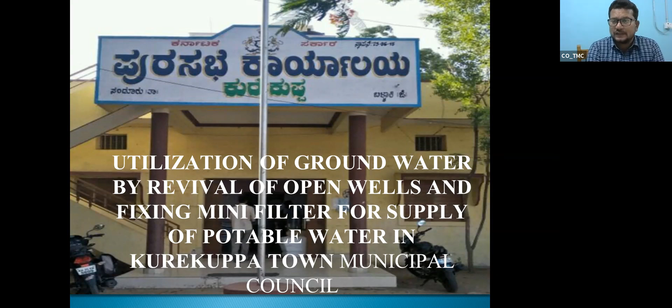I am presenting about utilization of groundwater from open wells. I am the chief officer of the town municipal council, Kurekuppa. Myself, B. Abdul Rahman. Kurekuppa town comes in the taluk of Sandur, in the district of Bellary in Karnataka state, where there is Asia's largest steel plant in our jurisdiction, which is called JSW, and it's a mining area. You all might know that.

In the year 2015, in the month of June, our urban local body was constituted as a town municipal council. Earlier, it used to be a gram panchayat. In every smaller urban local body or gram panchayat, there used to be a water supply scheme, which I'm going to show in a slide.

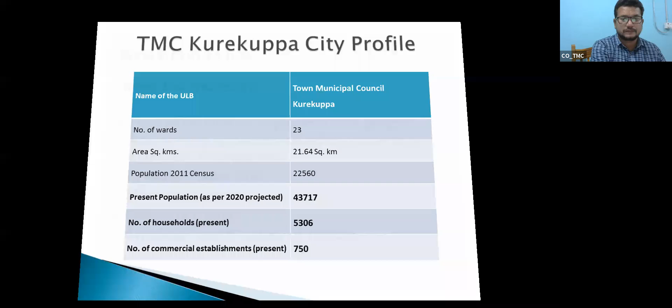This is the water supply scheme any town or gram panchayat is supposed to have, where there will be a source like a high level canal or a river, and we have to store our raw water in an impounding reservoir to supply the public for 365 days. It's an obligatory duty of the urban local body, per capita 135 liters per day. In such a situation, we were not having a 100% water supply scheme in our urban local body.

Once again I want to repeat the necessity of a water supply scheme: there should be a source, then a reservoir for storage, and the stored water should be treated in a treatment plant. After treatment it has to be stored in a pure water sump, then it goes for chlorination and alum clarification, and after that the water is pumped to water tanks and then to the distribution network. This system is supposed to be in every urban and rural local body.

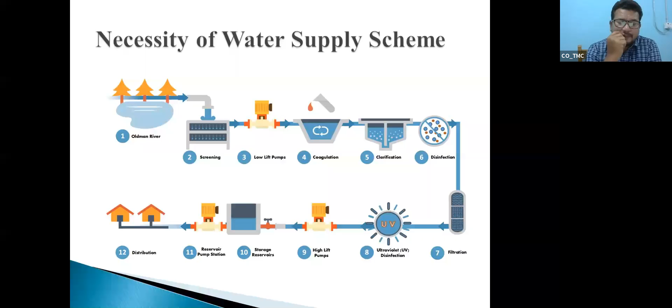Because this system did not exist, this was the previous water supply scenario in our town. Our entire town of 23 wards depended on groundwater from tube wells. The tube wells were fitted with motors, and after pumping we supplied to the GLSR you see in the next image, then from the GLSR to the overhead tank, and from the overhead tank to the network and the consumer.

This was our previous scenario, where raw, untreated water used to be supplied to every consumer. That water was contaminated with fluoride and many effluents. It was harmful to the general public of our town, and the public demanded RO water.

We considered reverse osmosis plants, RO plants ward-wise. But to purify 1 liter of water, 18 liters of water were wasted. To supply 1 liter of pure water, we used to waste 18 liters of water.

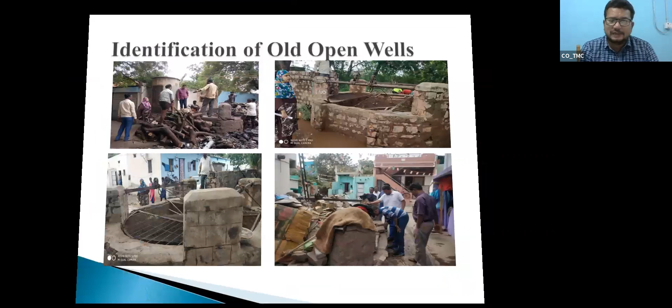So what we did, we identified some of the open wells which people utilized in olden days. Those wells were unused. People used to throw their house waste into them, and traditionally, after the puja they perform in their houses, they used to throw things like old clothes into the wells. Those wells were closed.

After having a discussion with the local senior citizens, this is the present scenario. Because of not having an impounding reservoir or a water treatment plant, people are not getting potable water to drink. So what is the secondary source?

When we inquired with the senior citizens of the town, some came up with a very good idea: Sir, in our childhood we used to utilize this open well water, which was very good water. After the establishment of industry in our area, the water was contaminated with effluents. And the tube well water you are supplying at present is contaminated with fluoride. We are not getting good quality water to drink.

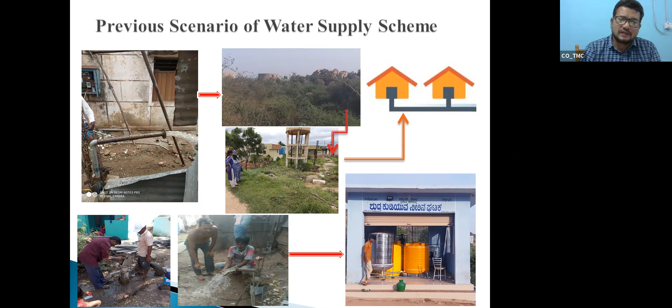So we had a discussion with the local citizens of our town. Then we came to know there are some wells which had been closed. So why can't we use these wells? Then what we did, we inspected the wells.

We identified some of the wells which are not of any use, and we started checking the yield of those open wells. We came to know that the well is having a sufficient supply of water which could provide 365 days. So why can't we utilize these wells to supply water after purification of water?

Usually, to have a scheme of water supply, it requires some 5 to 10 acres of land for the construction of an impounding reservoir, where it costs about 5 to 6 crores, and for construction of a water treatment plant, again it costs about 2 to 3 crores, and for the distribution network, again it costs 4 to 5 crores, and for the supply by gravity from the reservoir after the purification plant, again we require overhead tanks.

Through overhead tanks, it has to come to a distribution network. From the distribution network, it has to go to the end consumer. This system costs around about 50 crores rupees. So being a newly established urban local body, with constraints of sufficient funds, insufficient technical staff,

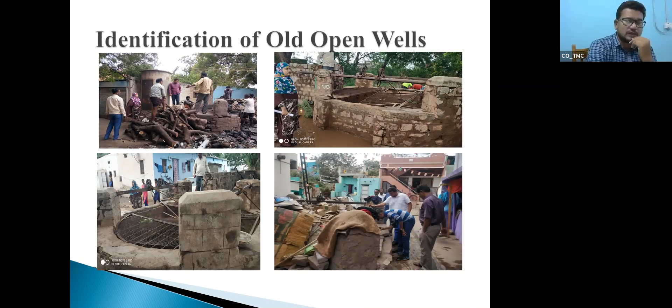This is the slide which shows the identified open wells, along with our engineers and council and the area councillor. We identified the wells were heavily filled with silt and traditional flowers and all. The people used to cover the well and store their old household items, like, as you can see, some of the people have stored their wood

and all. We desilted the well, and again we pumped out the entire water to see for how many hours the available water is getting pumped out. We calculated and checked the yield, how long it takes to empty the water from the well. So when we came to know the yield is sufficient in that well, we started repair of the well. Whatever the well required, we repaired, and then we designed a pump, and after designing the pump, we designed a pressure filter.

The pressure filter contains a sand filter, and the water is purified with chlorination and alum. Earlier, it was not getting any kind of treatment in the previous scenario. Every citizen of the town is supposed to get potable water, but that water they were not getting. After identification of this well, we installed mini pressure filters.

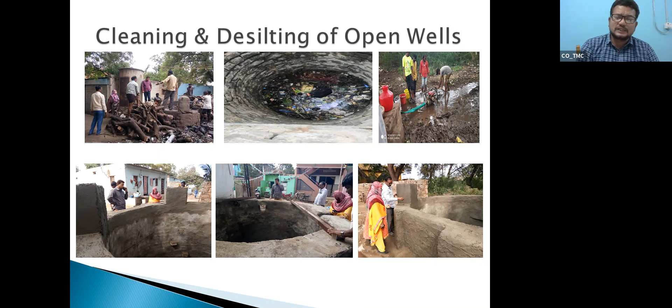whereas to supply potable water every municipality has to spend around 70 to 80 crore, at a very minimum with the available source, by regenerating and utilizing these open wells. After purifying the water, we are supplying it through the same existing system, reducing the cost of production of water, and we are saving energy. Earlier, energy used to be consumed for bore wells, and very often these borewells needed repair. In summer, we faced very heavy scarcity of water. Present, this is the scenario of our water supply scheme.